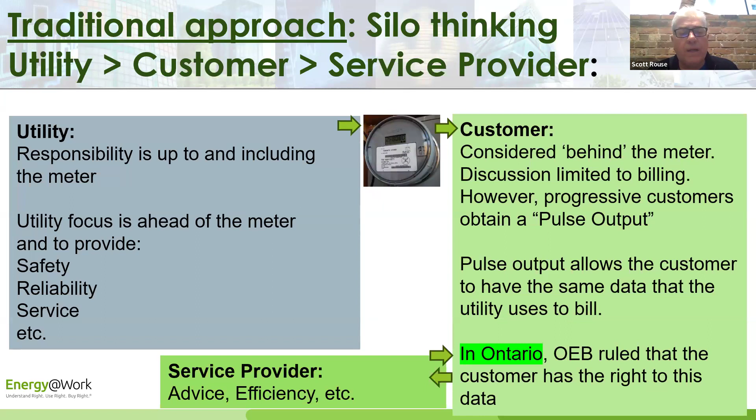We put real-time monitoring on a lot of our meters, whether electricity, gas, steam, chilled water. Just having that data makes it very helpful to understand what's actually taking place. And that's really the role of the service providers, to provide that advice, looking at efficiency opportunities, etc.

What we're thinking is that there's this new partnership, and we're starting to see it happen already, where utilities are now working with the customers to better identify this win-win-win opportunity in energy efficiency, storage, renewable options. I think we're seeing a whole platform of new opportunities. And of course, the service provider is there because they've got a lot of the tools. And again, we need that data to best understand. And the expression I like to use is we want to listen, but we want to listen with our eyes. We have to let the data tell us what's happening.

So when we look at The Matrix, which happens to be one of my favorite movies, and when I look at all the data going down the screen, I can't see anything. I never see the woman in the red dress. But when you can take that data and you refine it through a tool or a software like RETScreen, all of a sudden it starts to tell you. This particular graph on the right is a steam profile of CUSUM.

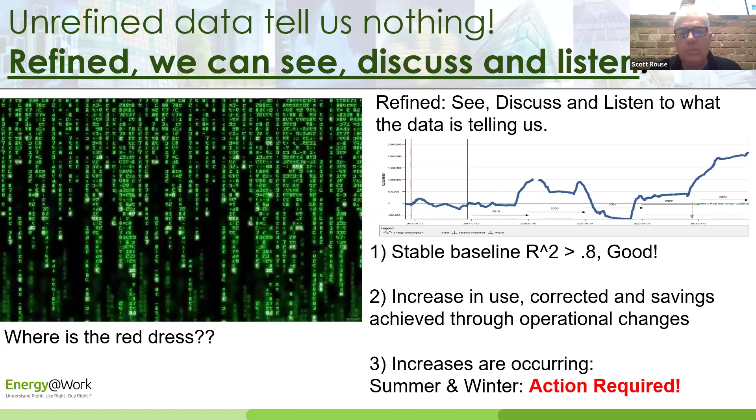Amir is going to be talking a little bit more about it. We have a very stable baseline, R squared better than 0.8, which is great. We can see when the steam usage increases, decreases. In this case, we saw a slight increase in the summer and then a dramatic increase in the winter. That spurred action. And we're now working with the operations team to find out what is actually taking place.

So when we talk about data, what is good data? This particular file we received, it was steam data. It had over 45,000 rows, 5 columns, over 200,000 data points. Sounds pretty ominous to get all that data, but really the data file was perfect. The utility provided an explanation of what the data was. Everything was tab delineated. Missing data was identified, which is a key thing when we get data. We don't want to see data that's interpolated, extrapolated, or missing without an explanation.

And the good thing was the data was provided in an Excel file in this case, or CSV. But the important thing is to have good data that you can use, and then having that, you can import it into whatever tool you're using. In our case, it was RETScreen. But what we want to avoid is this black box approach, where things are happening behind the scenes. We don't know what is happening, especially for third-party verification.

So I want to give you a specific example. We were working with Toronto Hydro. You can see their customers on the left-hand side. We're the service provider, and we're working with the utility. We developed our energy management action plan. We developed our measurement and verification plan, which Toronto Hydro reviewed and approved.

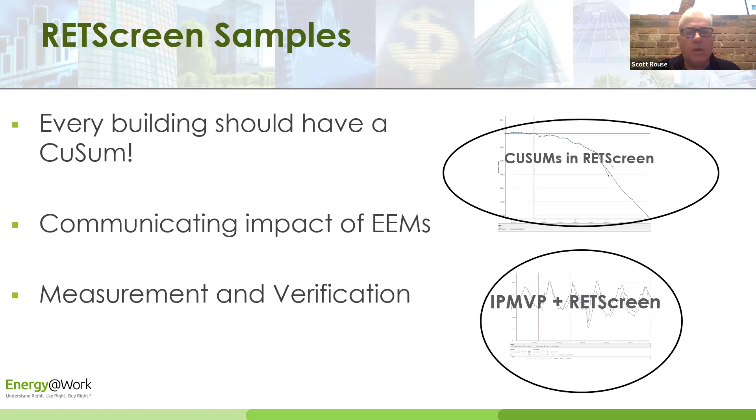So RETScreen, it is our choice of the tool that we use. As I mentioned, we probably use it every day. It offers a comprehensive suite of tools that you can use within RETScreen, and Stephen and Michelle are going to talk more about that. So I want to show you a couple of quick examples. We're going to be talking about IPMVP, how RETScreen helps measurement and verification. CUSUM, you're going to hear an awful lot about that and how effective it is. But just a very quick example, Stephen's going to give you a lot more.

This was a project that we're doing where we're following CUSUM. It happens to be natural gas. We noticed a sharp increase. And when we talked to the operations team, they could not explain why the gas went up. And because it was in October and we looked at the weather, we weather corrected, et cetera, something didn't look right. Make a long story short, we were able to talk to the utility.

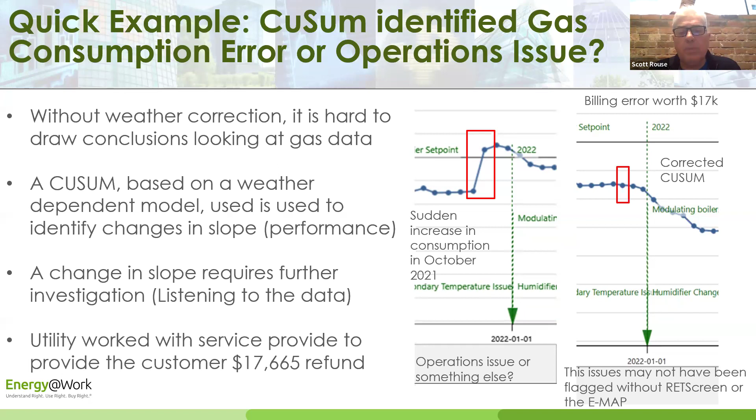We used the CUSUM to show what was happening. We went back into the system and we found that there was a billing hiccup. And we were able to make a correction to the CUSUM. Once we did that, we found there was a $17,000 correction on the bill. And more importantly, the greenhouse gas was able to be corrected as well. So that's just one small example. Stephen and Michelle have a lot more. Amir is going to be talking about the importance of measurement and verification.

But I want to turn it over to Stephen. And Stephen, I'm looking forward to hearing. I always enjoy your examples. So I'll turn it over to you. Thank you. All right. Well, thank you, Scott.

Appreciate that. So, yeah, you had one of my little quotes in there too about every building needing a CUSUM, right? So that's one of my favorite ones. Like I truly believe that.

So as I'm just waiting here for my screen to get ready, I'm going to just make sure we're all good here. So see here. There we go. And RETScreen loaded up. All right, folks. So good morning. I've got some great examples to share with you. I'm excited to also see what Michelle and Amir are going to show you too.

My job this morning really is twofold. I mean, Scott, you described it as the utility perspective, and I will do that, but I'm actually going to do a little startup right now. Hang on a second. A little startup around what RETScreen is, where it came from, right? Pretty quick. Many of you probably know that who are online. I know we got a few people that I do recognize the names of. But RETScreen is a tool that's used the world over.

I'm very proud, and I know Greg Leng is online. He's the creator of RETScreen. Very proud that this is a Canadian tool that's used the world over. And as Scott said, I use it every day. I've used it every day probably for the last 20 years in one form or another. So it's a very powerful tool. And it's an all-in-one tool.

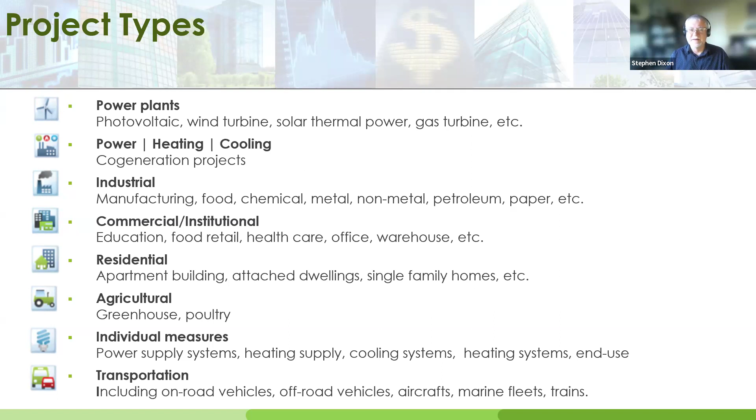Right? There's lots of contained data, what we call product databases. So if I'm going through and doing a photovoltaic system and I want to say, okay, let's just cost this thing out, I can pull the product, pull some costs for that product, pull the weather and the climate data to figure out how much sunshine I've got, and bingo, I've got a pretty powerful assessment of that particular project. So using the interfaces that are there, we can get access to a lot of things that we might have to go to different sources for if we were doing that in a spreadsheet.

I did a webinar, actually a couple of days of training a little while ago with a consultant up in the Ottawa area. They had all these spreadsheets they were using. After the 2 days, they were throwing their spreadsheets away when they realized what they could do with RETScreen. And we actually put RETScreen head to head with their spreadsheets, and it came out really well. They were quite surprised, and we in fact found problems with their spreadsheets by comparing it to RETScreen. So, very capable tool, all-in-one tool.

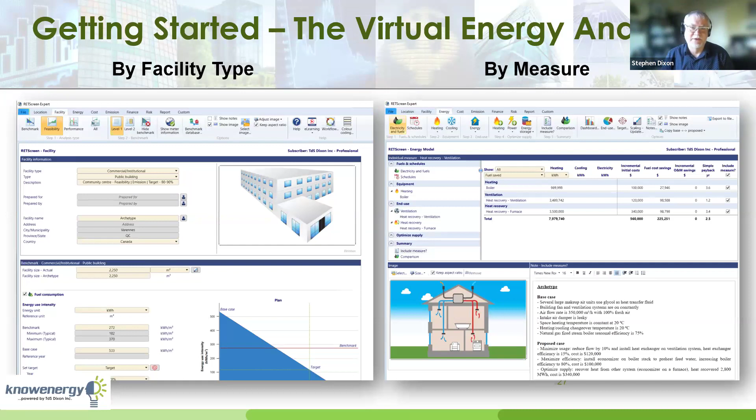So boom, you can actually bring up that particular project. So either a whole building or a thin slice through a building with a particular measure. And there's literally hundreds of measures that you can look at, hundreds of building types that are in there. So I just pulled a couple of examples here.

So on the left-hand side, we have a community center, right? So a building in a municipality. And the archetype was built around a 40% energy reduction. Here we see the screen we call the include screen, accessed from the toolbar up here. And we see basically the systems in the building, and in fact all the measures that are in play, because this screen shows the fuel saved.

And we can go through here and take a look at all the different measures that have been built into this. And we can turn them on and off too and build a basket of measures that have an outcome, meaning a financial result and a carbon result that meet our criteria.

On the right-hand side, here we see the deep carbon archetypes, right? An 80 to 90% carbon reduction. And in fact, by turning on renewables on-site and off-site, you can take that building now to 100% carbon reduction as well. In this example, they're showing it to 90%.

But there are measures that are left to your discretion that you can turn on, which will eliminate all of that carbon completely. It's up to you whether you want to spend that money now or down the road, maybe taking a building to net zero ready, which is kind of what this one is, and then eventually to net zero when it becomes economically or financially viable for you to do that.

So archetypes are really good ways to jump in and really see the way RETScreen works and what you can do with it. If you've got a municipal building, a school, an office, you can pull one up for all those different types of facilities and then really just use that as an example of how to build your building.

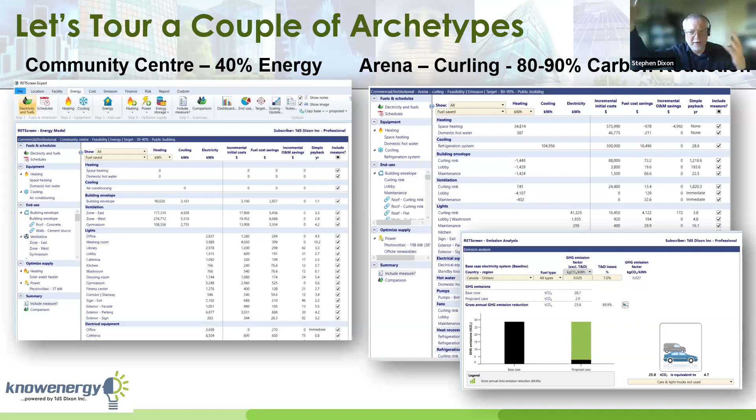And RETScreen actually allows you to set your target when you're doing your net zero plan. When do I want to get to essentially net zero or whatever my target is? So great tools for planning.

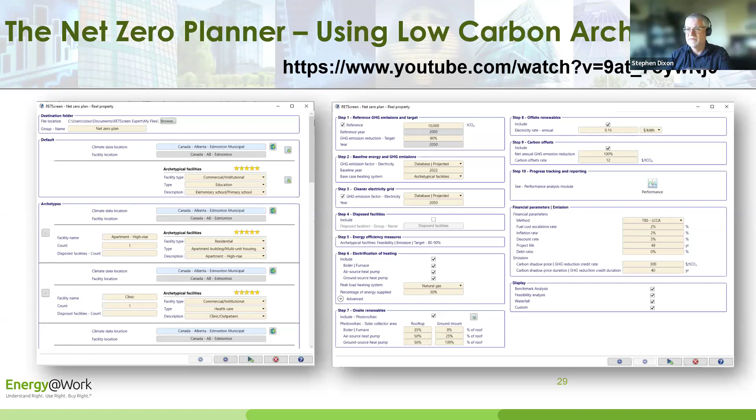So that's kind of my introductory piece. I want to go through a few examples in feasibility, and then I want to jump into my passion, which, well, if this isn't already my passion, even more so when I get into the performance analysis piece. But feasibility is pretty good too, right?

So you can do some pretty basic things like lighting. But the neat thing about lighting when you go in there is that you actually get to pull products out of the database. So rather than guessing about what that characteristic of that device you have is, you can go into the product database, which is the one with the little shopping bag here, and you can pull the product characteristics out. And when you get down here to what it's going to cost to do this analysis, so we're still seeing lighting retrofits. Obviously, they're still out there.

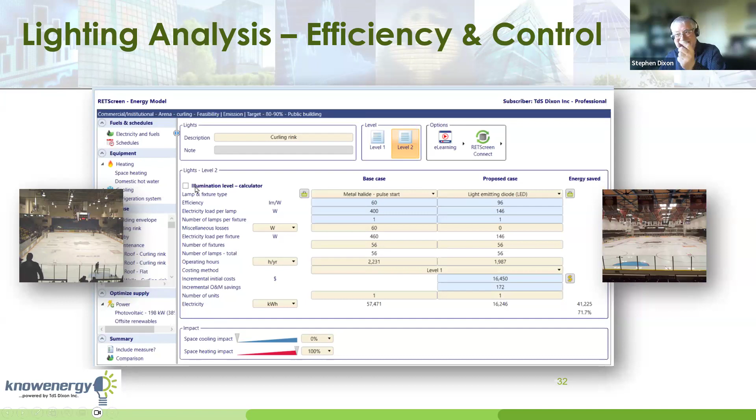You go into the cost database, and now you know the cost. So you can continue to do those lighting retrofits moving forward. And there's actually even a tool in here to allow you to make sure you improve or maintain illumination, not make it worse, which is one of the consequences of a poor lighting retrofit.

When it comes to the HVAC side of it, RETScreen has a pretty reasonable, I mean, it's a full ventilation model. It allows you to look at the airflow, but all the different permutations of things you can do to influence the airflow and the temperature. So actually, Michelle, you're going to talk about doing heat recovery on a ventilation system later, right? So you'll talk to us about how we use RETScreen to do that.

So we not only have to model the way it is today, we have to model the way we want it to be, and we have to recognize the conditions that exist in the building as well.

Yeah, I also want to mention, Stephen, that in our treasure hunt, RETScreen is probably the primary tool that we use to very quickly provide the feedback to the people. Say, this measure provides so much savings, and we know we can trust it. It's a proven tool. So it's something we use, like Scott said, I won't say daily, but almost daily.

Yeah, I use the ventilation tool a lot when we come into a building where their makeup air unit, in the mechanical room or a penthouse, is operating outside of the schedule it needs to operate. So I can simply adjust the schedule, drop the time, and show very quickly what those savings in both heat and electricity are going to be, right? So I can show both sides of the house.

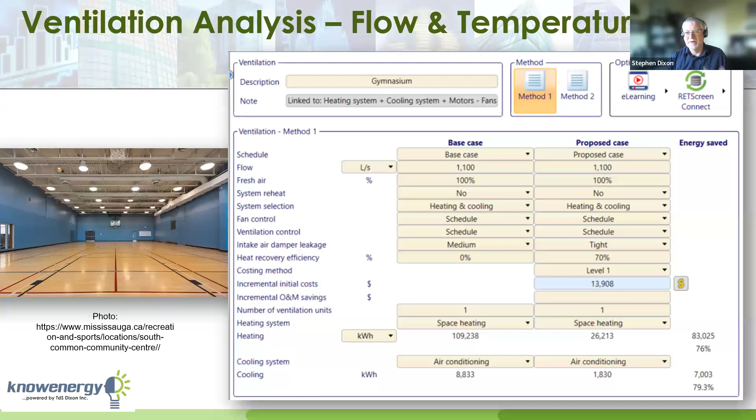This is an example. Sorry, Stephen. If I can jump in as well. When I talked about the over 100 people that we work with and getting the right information to the right person at the right time, being able to talk to an operations manager, an operations supervisor, and give them hard numbers, that just builds the case so much stronger. And the turnaround time, instead of taking the next week, you do it in the treasure hunt, which I think is so powerful.

Well, I always say that working with a group of operational people in a building, the operators, to find ideas to save energy is great. But when we can put numbers to their ideas, that's amazing, because their ideas become seen as the value that they are, right? Putting numbers is important. That's where we use RETScreen.

Here's an example. I was doing a workshop a little while ago, not specifically on RETScreen, but this was in the early days, and I said, you could use RETScreen to evaluate a lot of different things.

And there was a guy in the back of the room, like, clear, I'm looking for my cell phone here. So he's on his cell phone, and I'm talking away in the front, and he goes, "Steve, hang on a second, I got a question." I said, "Sure, what's the question, Mac?"

He said, well, my insulation contractor, I mean roofing contractor, is putting a new roof on our extension of our long-term care home, and he wants to know whether I should not go to R10, but go to R20. He says, we can accommodate R20 in the roof with the structure and everything, right? And there's a lot of issues, but he says, we can deal with it.

So he said, do you think I should do it? Do you think your fancy tool called RETScreen could help me to answer that question? I said, sure, it can, right? So I actually literally asked them, okay, how do you heat your building? What temperatures do you use? What's your boiler efficiency? What's the efficiency of your air conditioning system?

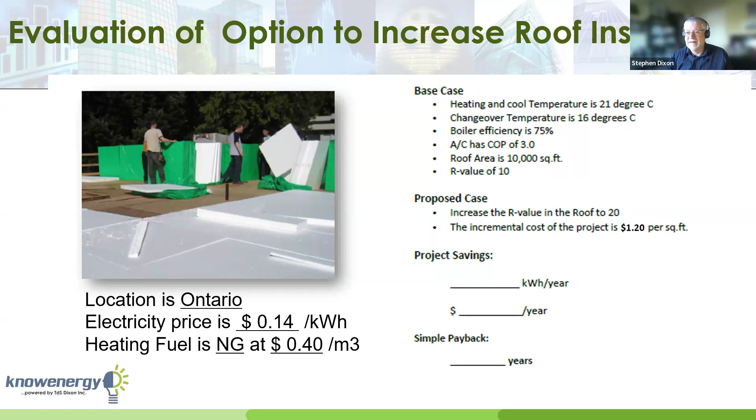You're going to go from R10 to R20. What's the roof area? Let's do the calc. Oh, by the way, what's the price for your energy, your electricity, natural gas? Got that in there. Your building is in southwestern Ontario. Okay, let's do it. So I literally did it right then and there in the session. Took me about 5-10 minutes.

Used the envelope model, did a thin slice into the envelope model, modeled the roof, right? Put in all the requisite parameters. I was actually able to show the carbon reduction. But the neat thing is, it came up and said 8.6 years, right? Because the contractor was quoting $1.20 a square foot. I said, Mac, why don't you offer him 80 cents a square foot?

And he calls the guy up. I said, I bet you he's got the insulation in the truck already. He's just waiting for you to say yes. He says, yeah, that's exactly what happened. And he went for the 80 cents. So he took the payback from 8.6 years, I think, down to about 6 years, right? So that's worth doing, right?

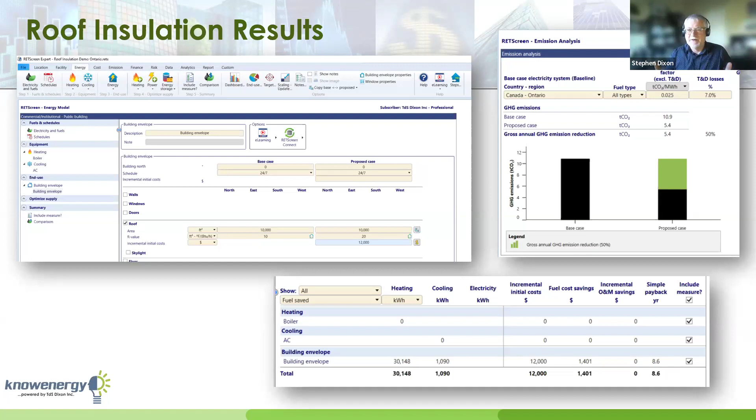To answer the question, that roof, even at $1.20 a square foot, it would probably be worth doing, but definitely at 80 cents a square foot. So RETScreen, one of its positionings is basically a decision support tool. There's a decision that was supported by RETScreen quite clearly.

All right. The other thing, a lot of questions come up today around heat pumps, right? Does it make sense to put a heat pump in, an air source, a water source heat pump? RETScreen has tons of tools to do that. Now, RETScreen has two ways to do this, which is kind of interesting. One way many people who've used RETScreen are probably aware of, is you simply change the heating equipment from gas to, say, a heat pump, and the gas has an efficiency of 75%, the heat pump has an

efficiency of 159%. In the newest version of RETScreen, you can actually distribute your load between your heat pump system and your conventional system, so you can model a hybrid system in this case, right? So that's what we call an energy model.

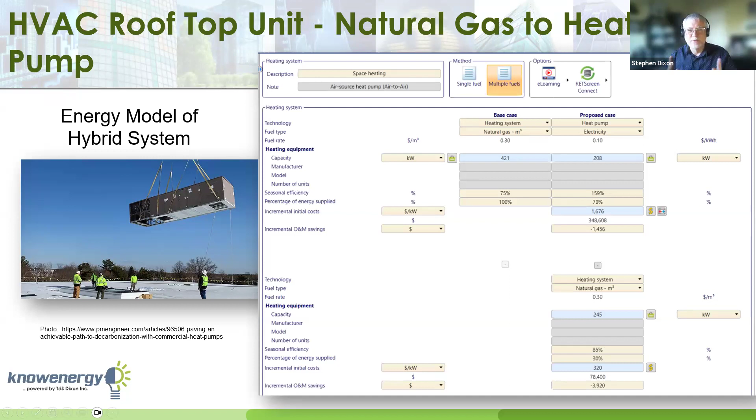But RETScreen also has, really interestingly enough, what we call a power heating cooling model, which allows us to actually look at the loads in the building, okay? And it actually allows us to begin to, I'm going to very cautiously say, size the heat pump itself. And what we can do is take a few numbers. We need the area of the building, the efficiency of the heating system. We need the heating load for the building.

And where are you going to come up with the watts per square meter? Little trick in RETScreen. If you know your gas consumption, your electricity, then you can work backwards to the heating load in the building. Once you've got that, RETScreen will then determine for you what you can reduce. And what I like about this tool is it allows me to size those hybrid systems where I can use 60% of the heating capacity that I need and get 90% of the carbon reduction, right? So it allows me to play what-if with that sizing.

Maybe you want to go all heat pump, but maybe you don't, right? And RETScreen has the tools to be able to make that assessment. That's a big question today. A lot of people ask that question.

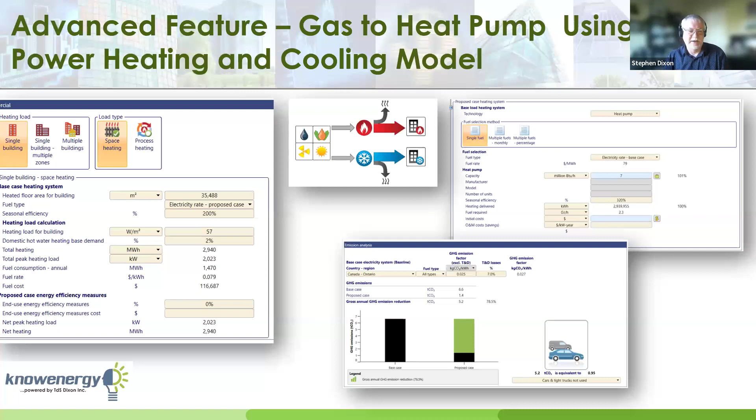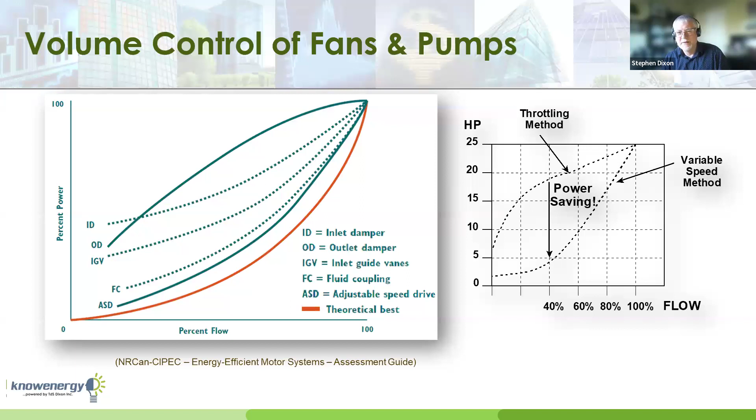If you're dealing with volume controls and fans and pumps, and I use this a lot in our treasure hunts, right? We can relatively quickly go into RETScreen and actually use either the pump model or the fan model and deal with how we change the speed, how we throttle it. In the fan model, it actually even deals with all the different types of fans you have, right? You might have different types of methodologies for reducing flow, inlet damper, outlet damper, inlet guide vanes, fluid coupling, or adjustable speed drive, right? But it also deals with a forward, backward curved, axial fan, and so on.

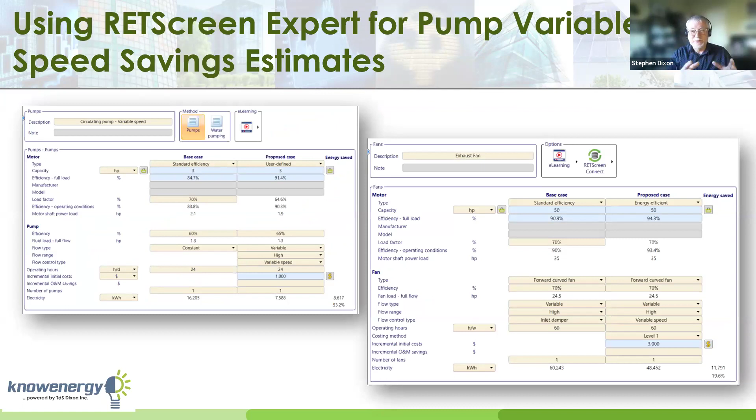So RETScreen, on the surface of it, seems a bit simple, but if you dig down underneath it, some of these models are actually quite sophisticated. And the pump one, I've actually run that against real retrofits on a number of occasions. And even though it's a relatively simple model, it asks you whether you're throttling lightly or heavily. It actually comes relatively close to the answers in the end. As a first pass, very good tool for estimating the savings, right? And ultimately, you can create sort of visible results from all of these types of measures.

The financial side, not the least of which is very important, very capable. This is where RETScreen started. Thanks, Greg, for the amazing financial engine in RETScreen. It actually allows you to do present value analysis quite effectively. They've incorporated modified internal rate of return, which is a much better measure of the internal rate of return of a project, but tamed down by the discount rate. If you're a financial analysis person, it has the tools for that.

I don't know if I have this. No, I don't have the screenshot, but it has the risk and sensitivity analysis too, which allows you to permute the different financial input variables and see what's the likely outcome of the project. It could be out here, it could be out here. So by managing certain input parameters, the ones that present the greatest risk to the project, we can then manage the risk of the project too. So it's a tool for little projects. It's a tool for big projects, right? Great tool.

And for me, one of the most powerful tools in RETScreen is the ability to generate a CUSUM. If you have heard of it, you know what I'm talking about. For those that haven't heard of a CUSUM, it's very similar to what a financial person would do. A financial person would give you a budget, or ask you for the budget, but eventually you end up with a budget for financial spending, right? That's essentially like the predicted value, what we predict you will consume. That's your budget. And then you move into your spending period and you spend money and you have your actual spend. That's like you begin to consume energy after you've created a baseline model. So we've got the actual consumption and the predicted consumption, just like the actual spend and the budgeted spend.

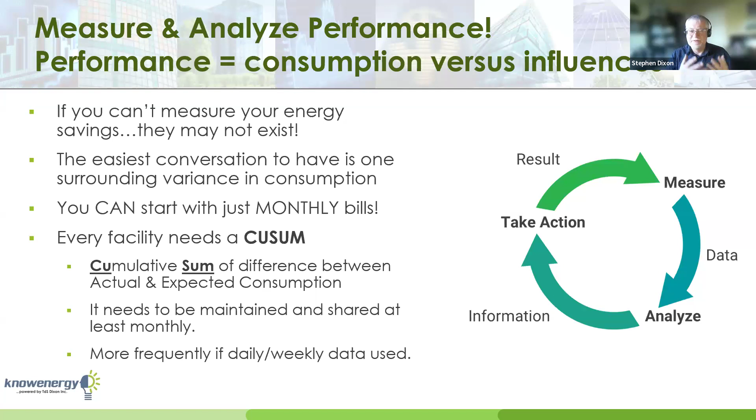So it sounds like a complicated piece of math, but every financial report has it, right? That to-date variance from budget. It's the same arithmetic. How you end up with a budget in a financial report is a little bit different than how you end up with a performance model. But basically, we use regression analysis, statistical analysis to come up with that in RETScreen. So once you have that baseline model, then you can begin to plot these CUSUM curves.

But then they realized that they'd serviced the boiler or the economizer about 12 months in. When they put the economizer back into service, they'd forgotten to release the valve. There was no water flowing through it for 2 months. And then eventually they got the thing back on track. So you can really see things you could never see otherwise, and people are not aware of, right?

You can catch things like the need for, people ask, we get asked a lot, how often do you need EBCx, existing building commissioning? Well, if you're tracking with the CUSUM, I've often seen the electricity CUSUM tail off, which means we're losing savings, right? What can we do? So there's so many things that we can see using this type of tool.

Again, RETScreen does this quite nicely, allows us to begin with data we all have. You don't have to go and get new meters. Utility data is all there, electricity and gas, right? We can get weather data, which is how cold, how warm it is, from RETScreen through the NASA interface. And on top of that, if we've got occupancy, other variables, we can input those really simply. We can develop those statistical models, and then we can drive out those CUSUM curves, right?

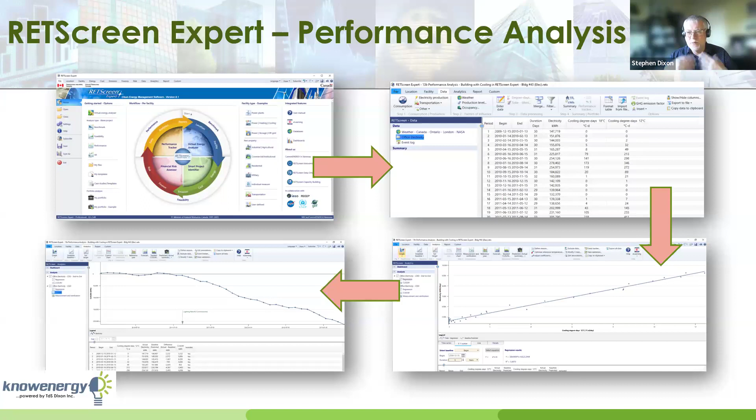There's an example, a building that had no idea what they'd done. We asked them, we want to do a little case study in your building for a webinar. Can you send us your data? They'd done a number of things, but they had no idea what they'd saved. So we ran their CUSUM based on the 2014 baseline, and this was the subsequent years.

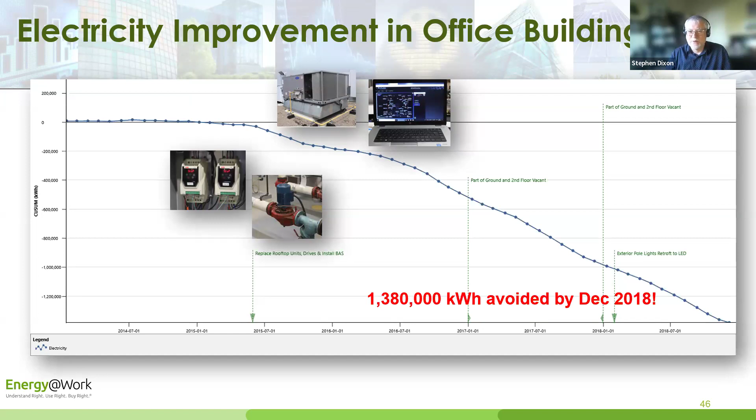By 4 years in, with these little projects, they could not believe how much they'd saved. They'd done the projects because they had to renew things. So guess what? Once they realized what they'd saved, what did they do? They went and did more, right? So it creates momentum to be able to measure and see and make visible all those things that you've done, right?

Now, when it comes to ways to get data into RETScreen, there are lots of them. Green Button, lots of interfaces. I actually use the hydro energy monitor in my house. This is actually some data from my own house, right? So I can pull it in electronically. Every time I open up my RETScreen file, it says, you're connected to a meter out there. Do you want me to pull the data in? Go ahead and do it.

You can have it in databases, and there are many other interfaces to other commercially available sources of data as well. So getting data in is getting easier and easier. I commonly just use a text or an Excel spreadsheet import. RETScreen is really good at parsing those files. They come in different formats, but most of the time I don't have to touch the file. There's only one that I have to touch.

It's the one where you get 24 hours across and then days down here. I have to transpose that or reformat it into a column. But other than that, RETScreen does a great job of dealing with many different formats. Once I get that data, I can create those demand profiles. This is an hourly profile. I can overlay the weather; the dotted line there is the weather.

Where do I get the weather data from? Do I have to go and download lots of data from Environment Canada? No, I just click one button in RETScreen. It looks at how much electrical data I have, and it goes and gets the weather data on an hourly basis from the NASA real-time database. It's available for the whole world.

Doesn't matter where you are on the surface of Ontario, or the surface of the Earth for that matter. You can get that data very easily, right? And the other way to present that data then is as a, what is this? Heat map, right? Where we can look at weeks down, and days across, right? Okay.

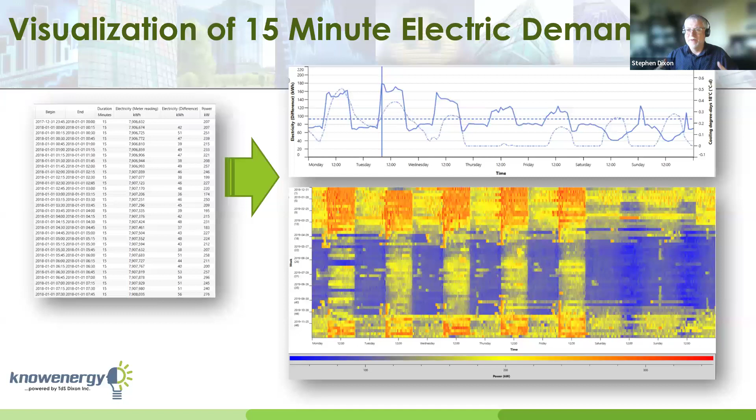And then every one of those pixels, I believe this is based on 15-minute data. Every one of those pixels is 15 minutes in the life of that building. So we can see the highest consumption times in red, the lowest consumption times in blue, and everything, right? I actually was looking at one of these, saw these big clusters, and it was really red. And I said, what's going on? That's tax season, where the accountant in the building keeps their office open long, right? So yeah, tax season.

All right. It says my internet's unstable. Is the sound still okay out there? Everything good? Okay. It's a little shaky. Is it better now? Hopefully.

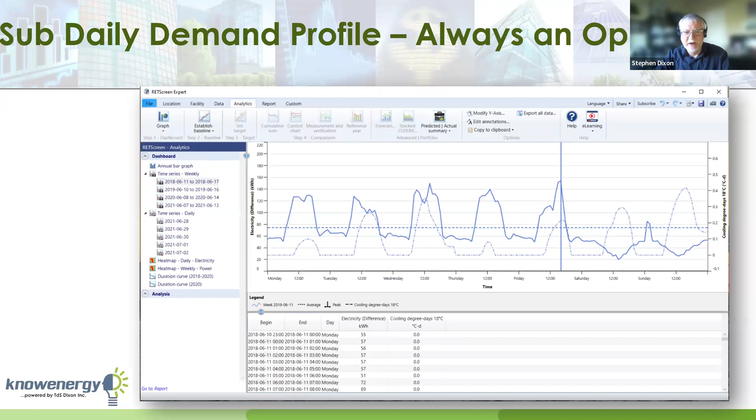All right. So it was an opportunity. I'm going to say that if you've never looked at one of these things before, there's always an opportunity, right? Two things I like to pick out are high use, those peak demands, but also how well does our peak behave, right? Sometimes we look at these, they're varying all over. That dotted line, what's going on in this? Turns out it was the control, actually it was a multi-stack chiller where we had 2 compressors, and it was slamming on, off, on. Guess what? You can see it. Like 15-minute data from the utility, that's all we used to do the profile.

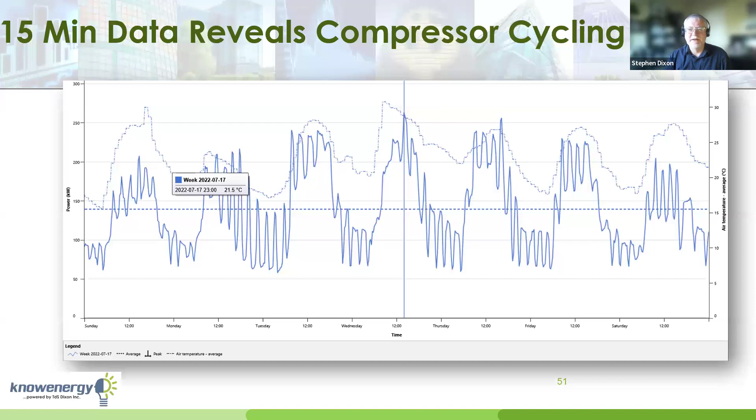This interesting one, in this case, what was happening? This was actually a building with gas and electric heat. Again, we see the chillers at night, but then during the day, at the end of the day, there's electricity consumption. What happened? Well, they set the temperatures up in the building, right? It was in the summer, so the temperature started to rise, but then somehow the electrical heating system got this idea that it needed to drive the temperature up to the set point. So they were going into setup in the summer, but the electric heat was kicking in to get to the new set point, which you're supposed to just let the building rise up to. Problem with the heating controls, which were conflicting with the cooling systems. Interesting. That problem existed before in the building, but they'd never actually been able to see it like this.

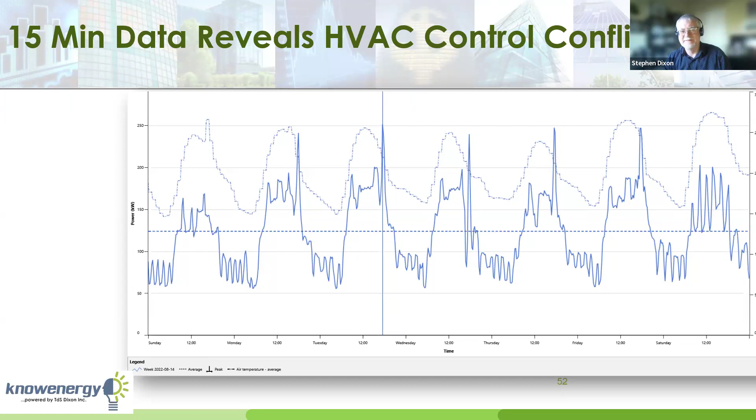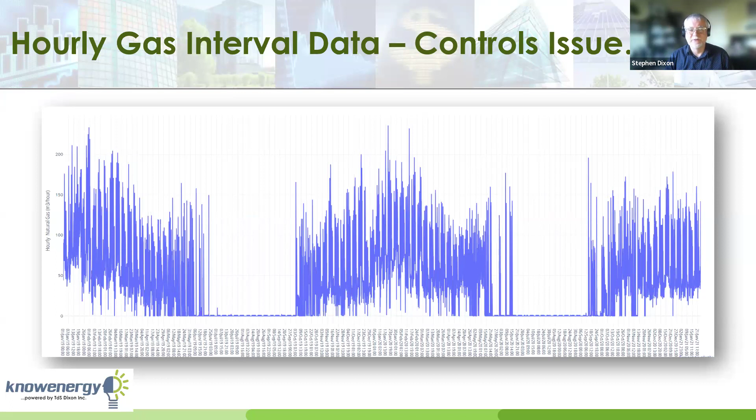As a result of this, they've recommissioned this building, and now they're going to use FDD, fault detection and diagnostics, to catch this in the future. So these types of things can lead to significant changes. Gas consumption, looking at hourly gas consumption, because we can get that today. Looking at the cycling of boilers, right? We can see sometimes, in a mild season down here, in this case, we've got 3 out of 4 boilers firing at the same time. Why do we need 3 out of 4 boilers firing on a day in June, right? Maybe we need to heat the building up, but do we need to heat it up that quickly? Well, it turns out there were some controls issues with the boilers. Looking at the hourly data, we can see that.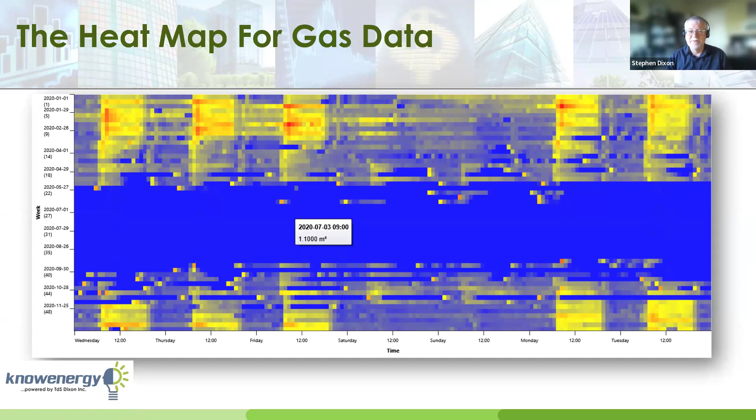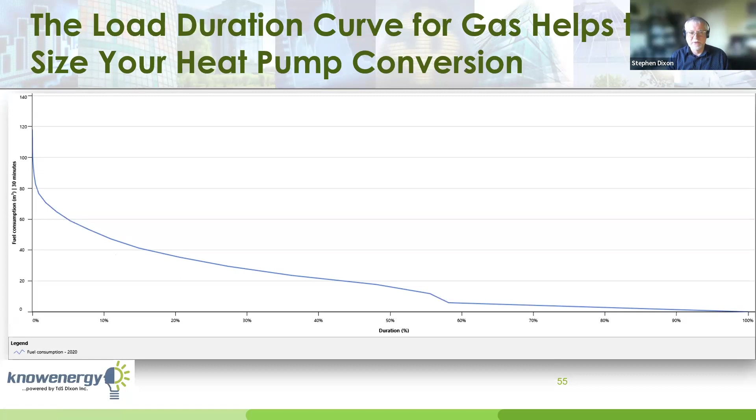All right, this is a neat example. This is my last example. So Michel, I'm going to get you to get ready here.

But basically, and this is entirely in the utility perspective space, Scott, right? So this was an LDC that we'd done some work with, and they called me up and they said, we got a customer concerned with a bill increase, high bill complaint, right? And this is about a 4 to 5 meg customer, right? They said, can you help me?

I said, well, can you get me some interval data? Said, yeah, we got permission from the customer. We can send you 2 years worth of interval data. And the customer was willing to send me production data, right? So then I went into RETScreen and began to use it to analyze it.

Now, I could do a daily analysis on that using the hourly interval data, bringing it up to a day, but it turned out that the way they report production in the particular plant, they didn't report it completely on the day ends, but by the end of the week, the production value was a fair representation of how much work had been done, and hence how much energy was going to be used to do that work.

Now, it turns out that weather was a much stronger variable than production, but both were needed to get a good statistical model. We actually then plotted the CUSUM. I'm going to jump to the CUSUM and tell the story, and I'll come back to the result. So basically, I was able to plot this CUSUM. And we had an online meeting with 4 or 5 people from the plant.

And I got involved in September, which is over here at the back end. So they were already on this big mountain, right? But they didn't notice it until probably August. So it took until they'd spent a lot of money before they actually noticed it, because they weren't using the CUSUM.

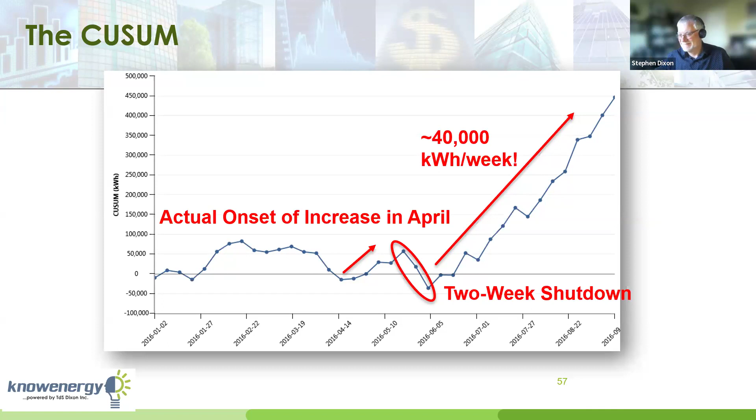So Michel and I work together quite a bit. Michel's going to go through and show you a few examples in RETScreen: tracking performance with production, looking at daily profiles for anomalies, checking the base load in a large commercial building. Base load is always good. How well does your building sleep? Looking at the load duration curve, using a feasibility model, heat recovery, and then using a portfolio to look at large building stock. So over to you, Michel.

Thank you, Stephen. I'll share my screen. You'll have to release it, though. Oh, really? Okay. Yep. I'll do that. There we go.

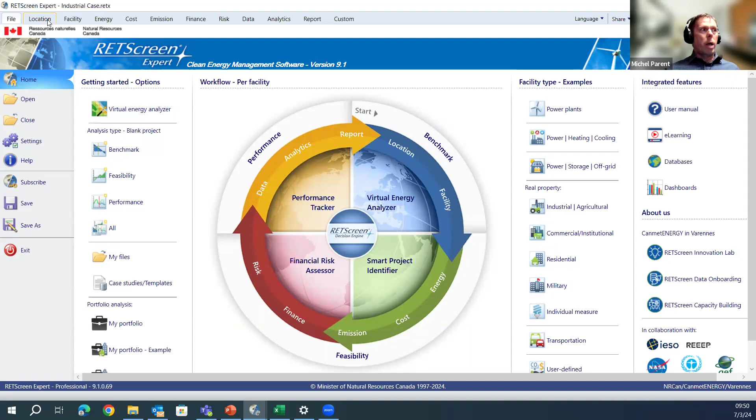So I'll start with the industrial case. As Stephen said, you can always locate your building wherever you want. So this building, it's easy enough. You just click on the little Earth globe here, and it will provide you a map of the Earth. You can locate your building wherever it is.

It is actually quite important to locate it in the proper location, because the weather data that you're going to import automatically from the NASA website will be for the location where that building is located. So it is quite important to have it fairly precisely where it's located. And I know sometimes there's a few tricks about that, Stephen, that you mentioned, if there's a body of water, if there's a microclimate, but typically you just put it exactly where it is. So in this case, it was in the Toronto area.

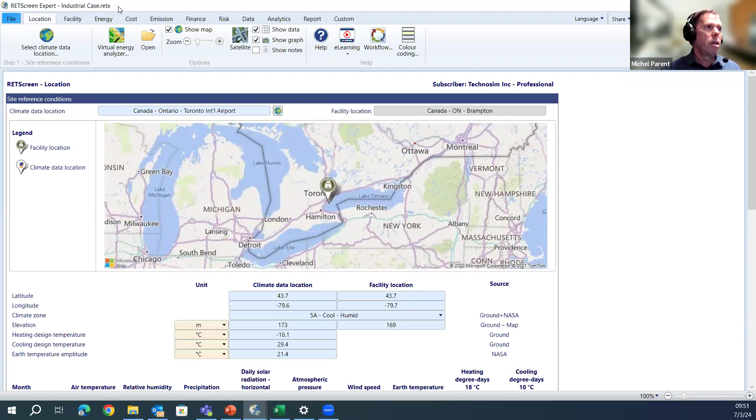And so the first thing we do, and all of the clients I work with that started using RETScreen, they start with performance. So I'm going to look at performance, then I'm going to go back to feasibility, because really they get their feet wet, if I can say, with the performance module. So in the performance module, the first thing you have to do is obviously, sorry, I clicked the wrong one here.

You have to define your meters, and it's very easy. You just go in here, define a consumption meter for the meters that you already have. In this case, I had an electricity meter and I had a natural gas meter. Obviously, there's other things that can be quite relevant, both for commercial and industrial. Water consumption, very important. Obviously, in industrial, production level, the example that Stephen showed. So you get all that information, you easily import it into those meters.

The one thing I really have to insist on with clients: make sure you tag any estimated reading, because later on we're going to do analytics. And analytics on estimated readings is not truly valid. So you need to know which readings are estimated and which readings are real. And that actually will sometimes teach clients that estimated readings are good for budgetary purposes, to be able to pay the gas company, because usually it's gas, sometimes water, that's estimated. So that's one heads up that you need to have.

In this case, we also had interval data, both at the 5-minute and 15-minute interval. Even if you have hourly, it's fine. It is actually very powerful to be able to analyze the hourly or sub-hourly profile. Well, Michel, actually, you should mention that there's a neat filter which allows you to deal with those estimated reads. It rolls all the estimated reads up into actuals for you. Actual readings.

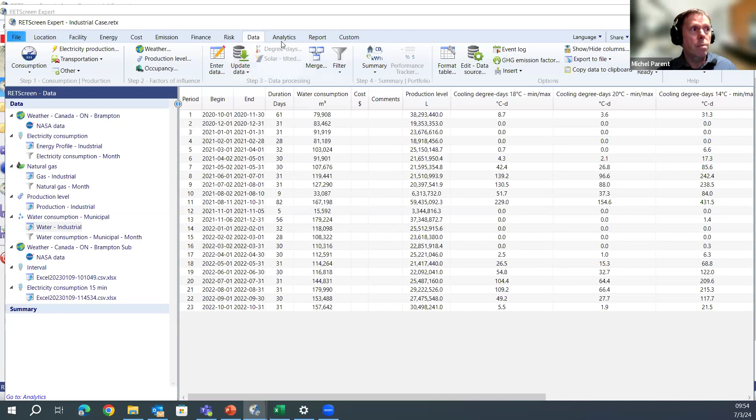So, like I said, the other thing that's really important is to have the proper reading dates. So again, from the client's perspective it's really to teach them: enter the real dates, not the month you received the bill, enter if they're estimated, and please, if possible, enter the kW, the power, and if you have it, the kVA, the apparent power, and that will provide you a really strong basis for your performance analysis with RETScreen. So once you've got all your data in there, you can go into the analytics and you can define, like Stephen showed you, a number of different graphs that can help an energy team have a look at their profile.

The one that I always insist that they learn to use is the time series, where you have your interval data and you can go and look at how is my building behaving hour by hour. In this case, it's 5 minutes by 5 minutes. And you will detect almost all the time going through that some anomalies, and sometimes it's the impact of changes in your plant. In this case, I've saved 2 profiles because it's easy to save, let's say, favorite profiles.

They made a change to the production facility, which they thought had an impact on demand because, you know, the cost was, but then they looked at the hourly profile and they could see that they usually were around 3,000 kilowatt demand. And once they made the change to their production, well, that actually jumped up to about 3,700 kilowatt, you know, it was 3,500, 3,700 kilowatts.

So it does help put numbers beside, and I'm not going into the really detailed analytics because again, it's the baby steps. When you're new into RETScreen, a new client gets into it, you really have to get the handle on how to use it fairly quickly. Those guys are busy. They're industrial people. Their primary goal is production. They sometimes completely forget about energy. As long as I produce, that's good. So you want something that will be quick.

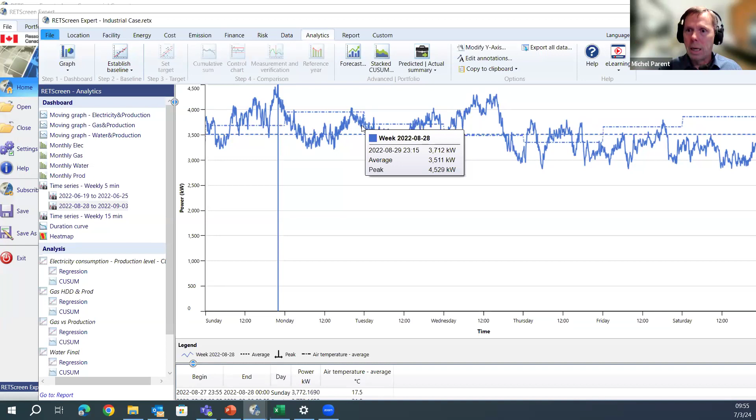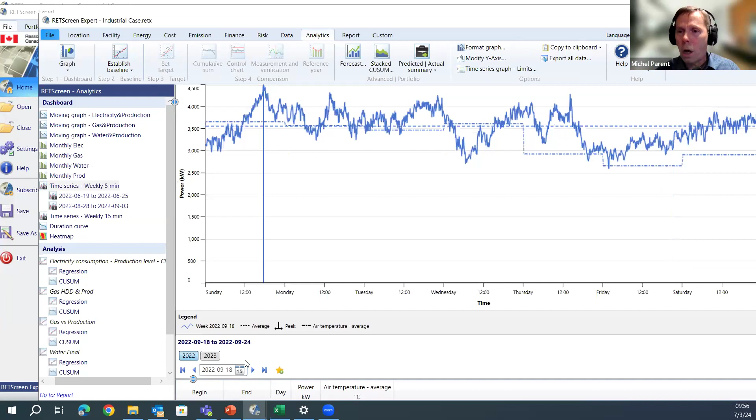And for looking at profiles, RETScreen is really quick. You can go through a year in basically like 5 minutes. You just go here and you go week by week. And it doesn't take long to notice. Sometimes it's a data gap like you just saw, but you will be able, once you know how to read those graphs, to see. There's obviously the load duration curve. And that one you have to explain to the client before you leave them alone with RETScreen.

And in this case, it will show you that this plant uses 500 kilowatt of power for about 20 hours in the year. I'm not going to go into the details of Class A and Class B electricity customers. We have an expert here with Scott on that. But if they can eliminate 20 hours that represent 500 kilowatt, that's a huge amount of savings that they could do to improve their production, reduce their greenhouse gas. So again, the load duration curve can be a good diagnostic tool to identify opportunities. So just an example of what I'd say the basic client that starts with RETScreen needs to learn.

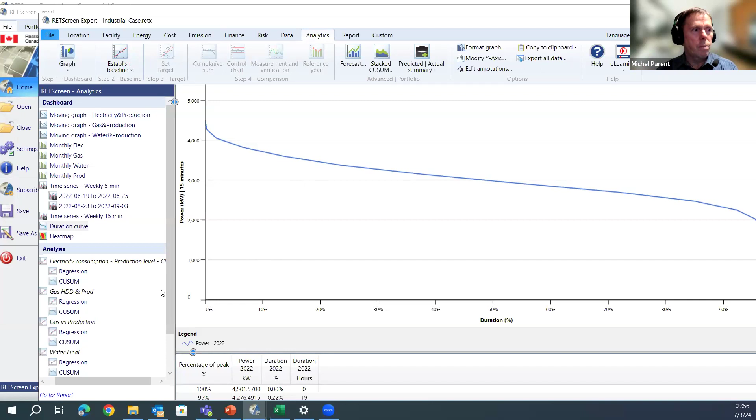And then obviously, very importantly, is how to produce your regression. And the regression will tell you how your building behaves or your consumption behaves with regard to your independent variable, production, weather. Sometimes people tell me occupancy for an office building, and I tell them, how do you measure it? If you cannot measure it reliably, it is not a reliable factor to put in your regression. It's one thing to know that it may impact it. It's the other thing to know that you have to measure it on a similar scale, actually, as your energy consumption data.

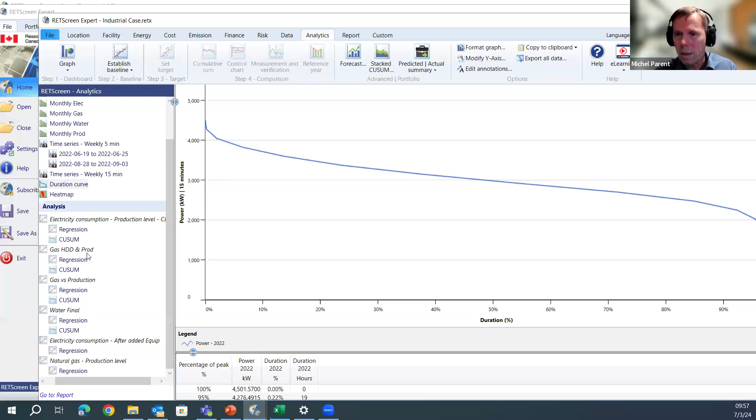So I always tell that to the client. They come with me, oh, this is going to influence my consumption. Well, do you measure it? If you don't measure it, you cannot put it into regression. In this case, the client was convinced that production was the primary driver of its gas usage. So I showed him how to do a regression. And you see here, there's one with heating degree days and production. Again, the client was convinced that those were the primary drivers. So we do a regression. Again, it's quite easy. You go up there, it says establish baseline. You can produce a regression.

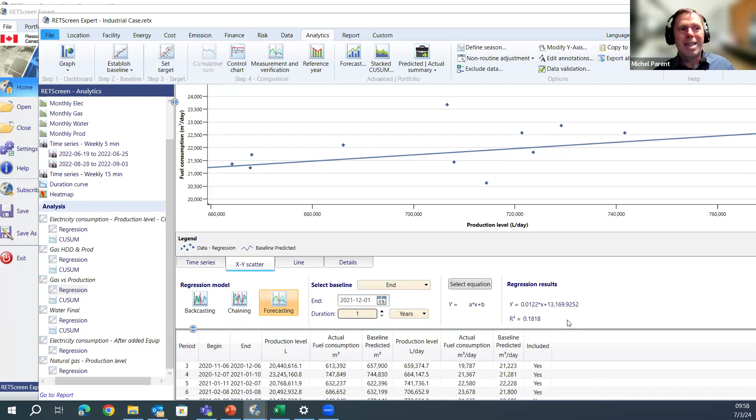Now, without going into the math, I'm a bit of a technical nerd, but I'm going to say the one thing you have to look at when you do a regression is the R squared. Scott mentioned it. You typically want something higher than 0.75, 0.8. You see that this R squared is very low. And if I would go into the details, I can also see that I've got what's called a T ratio that is not very good. It's just 1.5. You want something above 2.2.

So to the client's dismay, his production was not correlating very well with consumption. So we sat down and we said, why? And it actually goes down to what Steven said, idling losses. They had a lot of losses that they did not realize had such an impact on their consumption.

So just going through establishing the baseline, looking at the load duration curve, at the monthly profiles, they started already hitting some of their opportunities. And they started looking around and found a number of steam losses. And those steam losses, they're there all the time. They are not related to production. So that kind of explained their fairly poor R squared.

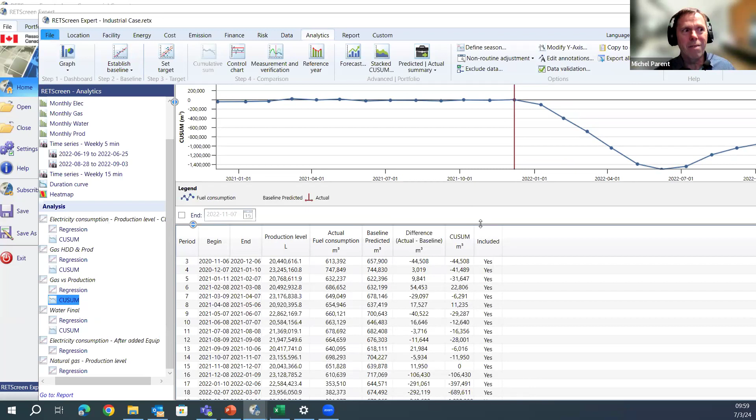And even though the regression was not very good, and actually I could do a different type of regression, not going to go in details, it still gives you a CUSUM. So it shows that for a period of time, the production was kind of humming along there. It's my baseline. And then there's this point where it turns down significantly.

And again, the client said, oh, I know what happened. It's when we had a boiler go down, and we had to keep production going with only 3 boilers instead of 4. So we kind of rearranged all of our production. We better scheduled everything. And they saved 1.5 million cubic meters of gas. That's like $300,000. They did not invest anything. They just changed the way they were producing.

Unfortunately, as soon as the boiler came back online, they went back to their old habit. They had never realized. You could say it's easy, they could look at the gas bills, but the accountant may pay the gas bills, the plant manager may not look at it. But now he knows that the CUSUM can give him that kind of information. Not only did they stop saving at this point when the boiler came back, but they started using more. That was a shock to everybody.

So it's another example: you implement it in a plant, could be a commercial building, you will actually start getting people to be more aware of the results of their actions.

And I know I'm running out of time there, so you got 5 minutes. 5 minutes.

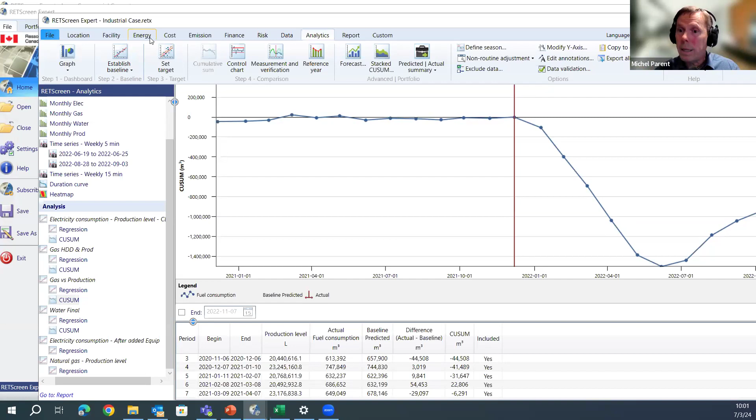I'll just show you for the feasibility. The guys in the plant did not have time yet and didn't have the knowledge to build a whole plant in RETScreen, but they did use RETScreen in the feasibility module to get steam losses. They had a lot of losses. So they say, we're not going to build a whole plant in RETScreen, but we want to know how much that 2 millimeter hole in the gasket there wastes. 75,000 kilowatt hour equivalent. And that is not the energy usage. That's the load associated with that loss.

Michel, can you make that inches? Can you change the units there? Because you can do this automatically in RETScreen, right? Yes. So inches, what is that? It's less than 1/8 of an inch. It's like 1/16 of an inch. Yeah. So it was tiny.

So again, they used RETScreen because they were starting. Eventually, the plant engineer says, if I have time, I want to build my whole plant in there. But they started with getting that kind of information. So you can use it piecemeal.

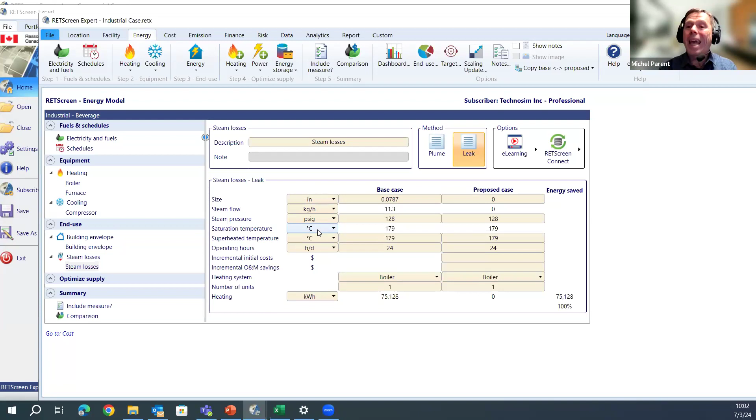Go ahead, Stephen. What's that worth? I always like to tell people, a 1/16 of an inch leak is worth over $4,000. Yes, and that's one leak. And I can tell you that plant had multiple leaks. And again, you could say they don't need RETScreen to know that they have leaks, but they needed RETScreen to raise the awareness and put numbers beside that. And obviously, they can then also put greenhouse gas numbers.

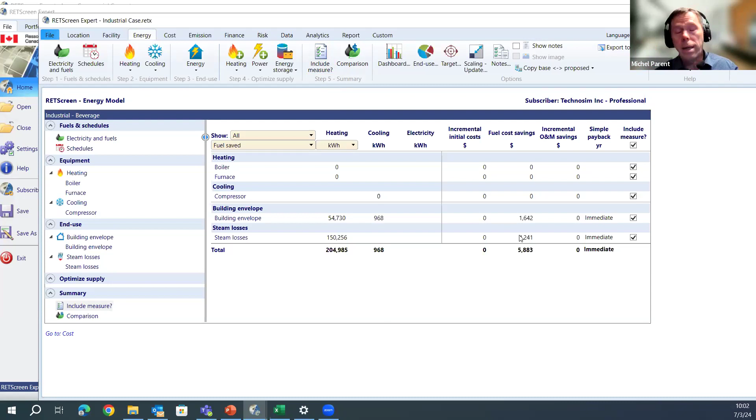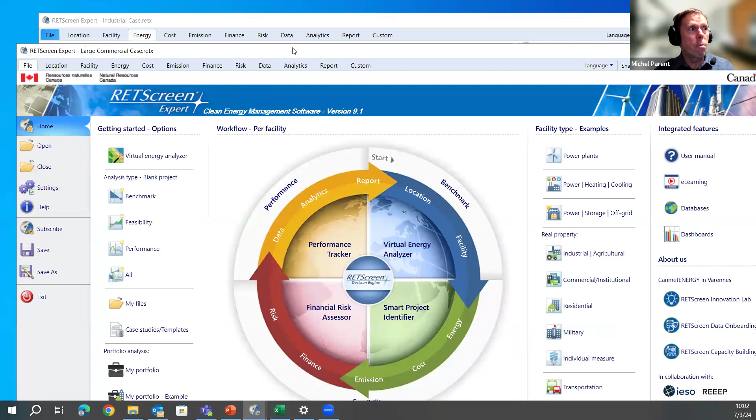But very quickly, I'm just going to show you the commercial facility, because it obviously has similar impact. They started with the performance module. Same thing, they entered all of their information. And the one thing I tried to teach them was, we have our CUSUM, we have the shape of the CUSUM. I tried to teach them what the shape of a CUSUM means.

When you have a CUSUM that goes straight down, that means you got a constant saving month after month. In this case, you see it has this stepwise profile. That means it's a seasonal change. So when you see that in your CUSUM, your savings happen either on a cooling system or a heating system. In this case, it's cubic meters of gas, so it's a heating system. You don't save in the summer if the boilers are turned off. So that's why you have to understand the shape of your CUSUM.

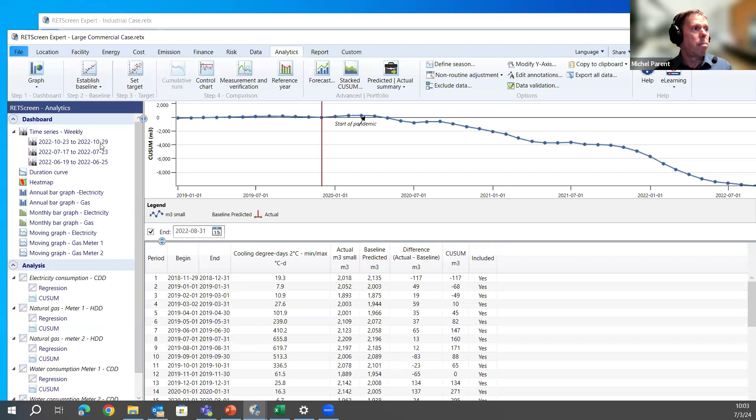So just another example. And what I wanted to show you is what Stephen said is the base load. They were very doubtful. I actually did an audit there, and I told them, your base load is like 80% of your consumption. It's in the building day and night. And they were doubtful. I said, let's go in RETScreen.

We import their utility data, and you look, the base load is always around 1,700 kilowatt. It never goes below that. So the daytime usage was just those little daytime bumps, which accounted for very little. So once the energy manager saw that, they started basically a treasure hunt for base load consumption, base load equipment that could be turned off.

And yesterday, Stephen, we talked about that. You save 1 kilowatt hour of base load, that can amount to not only a lot of kilowatt hours, but also demand savings. In this case, it's a Class A customer, so it can also be global adjustment savings. So it's because you reduce the entire building.

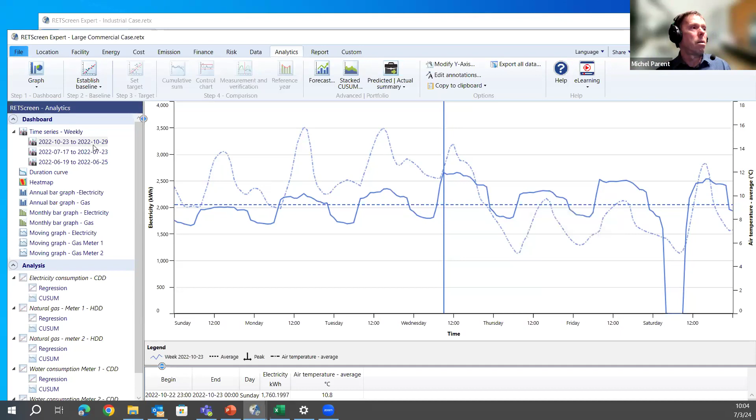The last thing I want to show you, and then I'm going to pass it on to Amir. The client had the same approach. They started with the performance module. They got really comfortable in there. They started understanding the CUSUM, looking at that. And then the building's really large. So they did not put the entire building in there, but they had a few measures that were proposed

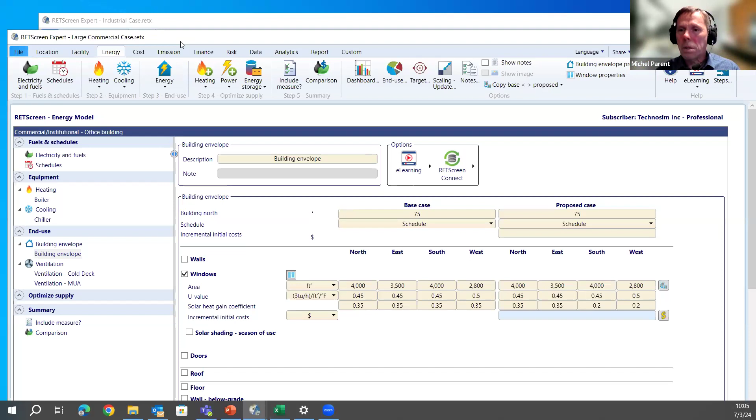to them. Some of them were for comfort purposes, such as adding a window film on the south and west facing windows. They say, what will be the energy impact of putting a window film? So we don't have to do the whole building. That's the nice thing about RETScreen. It's modular. So they just defined the windows. The windows are here. So you've got the U value and the solar heat gain coefficient.

They were not changing windows. They were putting a shading film. It was not a low-E shading film. It was just a shading film. So what they were doing is reducing the solar heat gain coefficient. And if I go down at the bottom, RETScreen will tell you the heating impact and the cooling impact.

And again, very often people tend to neglect the heating impact of window film, but this tool allows you to see that, hey, we put the window film, our heating is going to go up by 22,000 kilowatt hours. We will save 40,000 kilowatt hours, and that's not electricity savings, that's load savings.

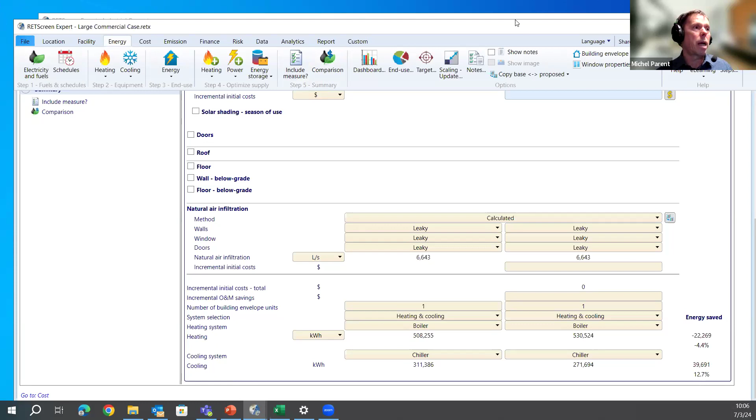Then if I go into the include measure, it will tell you how much; it's going to divide it by the COP of the chiller, it's going to divide it by the efficiency of the boiler. So it tells them information that's really useful in their decision-making approach. And the last one was the same thing for heat recovery. And sorry, Amir, I don't want to take too much.

Let's say they wanted to put a heat recovery device on their makeup air unit. Very easy, modular approach. You define makeup air units, 100% outside air, 234,000 equivalent kilowatt hours of load savings. So maybe 270,000 kilowatt hours equivalent of actual cubic meters of gas. So again, using RETScreen as, I'd say, a first step before even building the whole building in the feasibility module, it's able to provide them quick answers.

I had another example for what's called a cold deck system, but I don't think I'll have time for that, Stephen, so I'll pass it on to Amir. If anybody wants to do heat recovery in a cold deck system, just send an email. Just talk to me. And he'll show you how to do it. We're going to have webinars on it.

You've got to be very careful about cold deck systems. Yeah. You have a special modeling approach in RETScreen, because otherwise you will fool yourself into getting large savings. Cold deck systems are your VAV systems mostly. So yeah, there's a special way of doing that in RETScreen. We'll be doing a webinar which will star Michel showing us how to use RETScreen to do some maybe not normal things in terms of HVAC. So he's got some neat tricks.

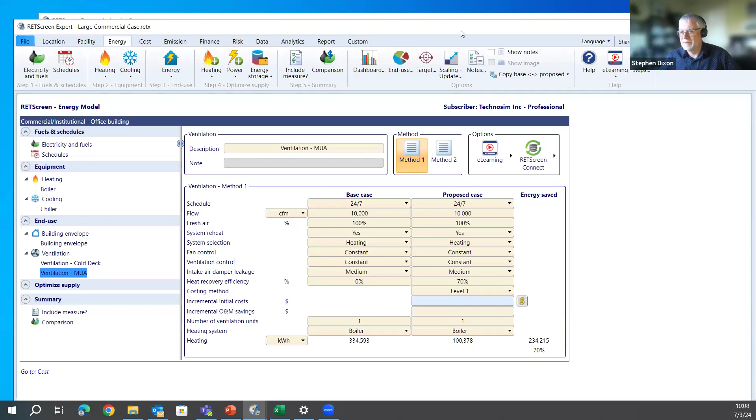Okay, you're going to need to release the screen there for me. There we go. Great. Okay, screen 2, and I need to give Amir some control here. So there, Amir should have control. All good. Go for it. Perfect. Thank you, Stephen. Hello, everyone.

Happy to be part of this presentation and share a service provider perspective. Michelle and Stephen both greatly covered the importance of looking at the CUSUM and performance analysis, which is exactly what we do and what we offer on a monthly and weekly basis in our meetings with the operation team. And so what I'm going to talk about today is touch on measurement and verification importance again, and then talk about why we chose to work with RETScreen.

Okay, perfect. So energy efficiency is the absence of energy. So we cannot measure energy efficiency directly. So we should have a reliable, transparent, consistent and conservative tool in order to measure energy efficiency. And what we use is the International Performance Measurement and Verification Protocol that is published by EVO. So this is our basic cornerstone for everything we do as an energy service provider.

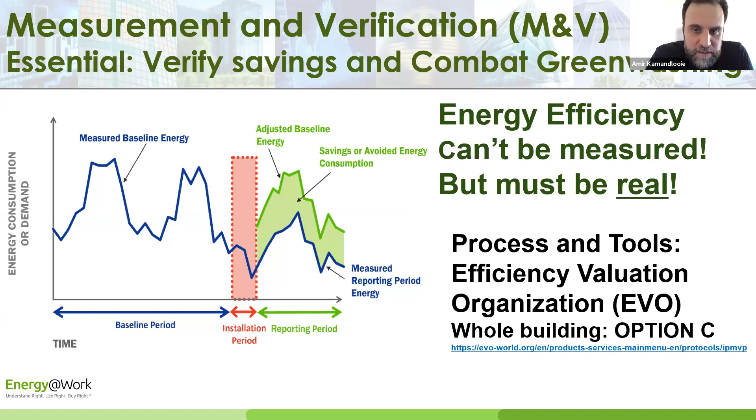And whether we do an energy audit, we do EBCx, or we do incentive programs for utilities, or retrofits, or everything else, we have to use measurement and verification to be able to verify the savings. And so this is what we need to do. And there are lots of tools out there that basically can do measurement and verification or performance analysis.

But what we found different in RETScreen, we tried to categorize into two main categories here. The number one was the M&V feature, which not only adheres to the IPMVP protocol, it also meets the principles of IPMVP, where we need to have a model that is consistent, conservative, transparent, relevant, etc. The link is there, and so we found that this greatly meets our expectations.

The second thing that we found, and we were pleasantly surprised by the RETScreen team, they were very proactive in dealing with the industry demand and need. And if I give you an example, that was at the time the pandemic hit. So all measurement and verification plans and analysis were kind of distorted by having low occupancy, kWh or consumption in the building. And we were fortunate that EVO came around and published a guideline for non-routine events and non-routine adjustments. And fortunately, RETScreen was one of the early adopters.

So they not only adopted this tool, which they made available in the new RETScreen version, they also reached out to us because they knew that we were working with the utilities on incentive programs. So we implemented that in certain buildings. So they knew that we have actual data. So they wanted to reach out to us and obtain the real data and feed it into RETScreen, which I think is great credit that I can give to RETScreen.

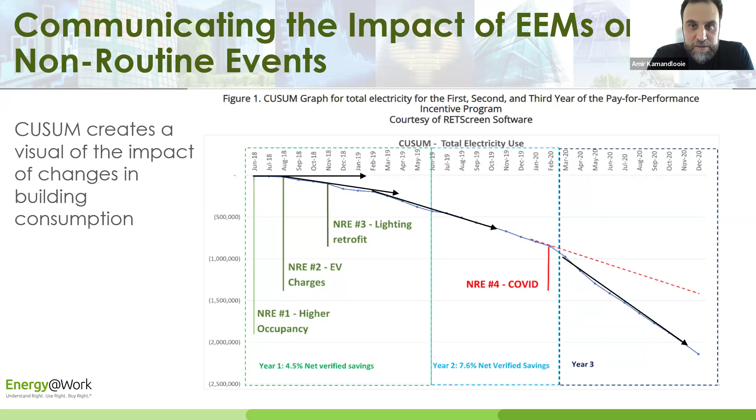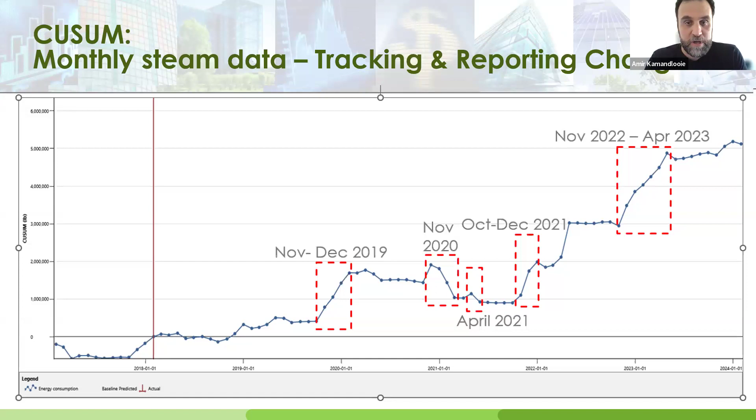So we reached out to the local utility, and they were great enough to supply the hourly data. What we are seeing here is the monthly data showing an increase in steam consumption for a commercial office building. And when we reached out to the utility, we got this. So we were able to create a much more granular model where we could distinguish between weekdays and weekends. This is very important because with the lump sum monthly consumption, we couldn't distinguish where the increase was coming from, weekdays or weekends, or what kind of increase we had.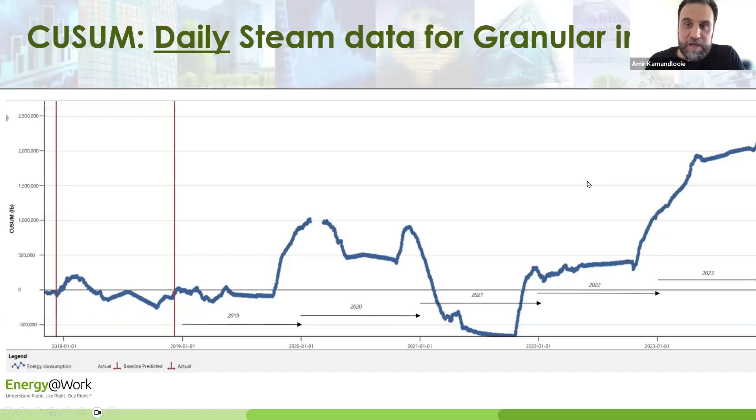So this is a kind of top-down approach where we take the raw data and convert it into information and a useful presentation in order to take it to the next step, which is the bottom-up approach, where we go into a property, look at the system, look at the function, and with the knowledge we obtained from the utility analysis, we can build up and start doing functional tests in order to get to the bottom of it and fix the issues.

I tried to just wrap it in the time that I had. Sorry if I went very fast, but basically that was it. I think we've all gone fast, but no, that was wonderful. You're right on the nose.

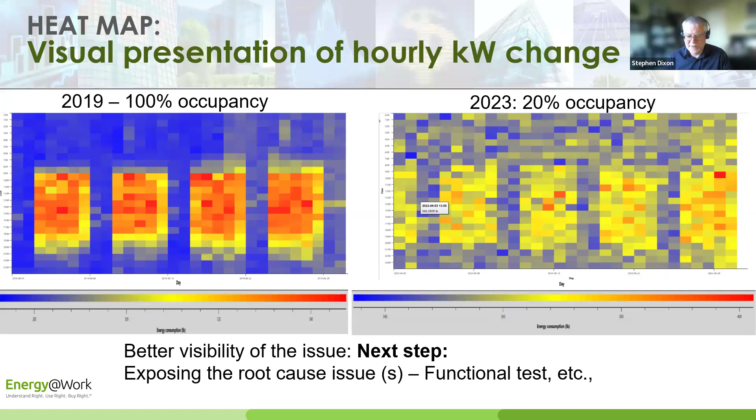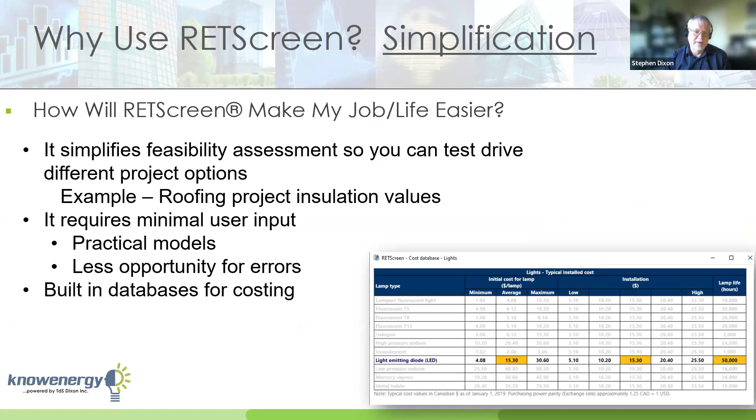Okay, so just to wrap this one up, you've got an all-in-one tool. All of these things could be done in one tool, right? You don't have to go and have different things everywhere, as you pointed out quite eloquently there, Amir. It's also a collaboration tool, and you can control what things people change as well. So I'm just going to run through very quickly why use RETScreen. Simplification, right? The consulting firm I worked with found that it made their job easier. Standardization, because then you're not using different numbers in different places. We're using standardized values, looking at, say, emission factors there.

Persuasion. There's lots of great, I mean, I could probably fill 50 slides with some of the persuasive graphics. We've seen a number of those, but even these progress charts that are part of the dashboard of reporting, you can customize and create those, link them back to data in RETScreen. Very powerful tools. Interoperability, working with different sources, right?

I did a webinar for healthcare a little while ago. We had one of the organizations that Michelle and I work with, Service New Brunswick, from the hospital. We had Kate Butler talking about how they do Portfolio Manager for all their buildings, and then they take the data from Portfolio Manager into RETScreen to do the granular analysis. They can see things Portfolio Manager can't see. They're using the tools hand in hand, interoperability, and then all the connection, green button, and everything else that you can get data in there as well.